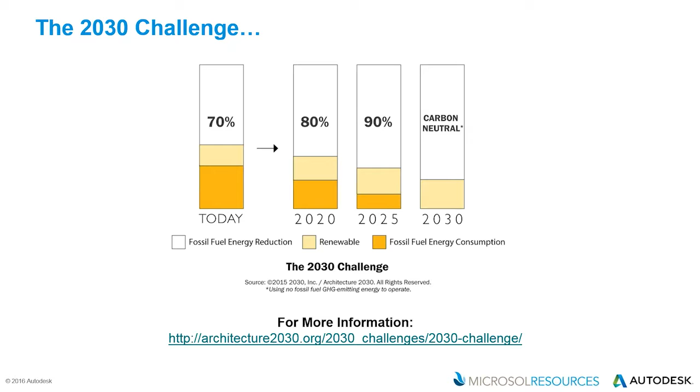The AIA 2030 commitment, on the other hand, essentially calls for all members of the AIA to aim for the 2030 challenge on all projects. And the words I've underlined there are really the key parts. That's aim for. In other words, you don't fail if you don't meet these goals. But the point is, we're trying to transition the industry, trying to educate more owners on the benefits of doing this. And so the first thing is to aim for it on all projects.

And the other critical thing that people often overlook is that they want you to report your data. And I'm going to get into what that means in a little bit.

Well, people often think of it just as the goals, but in fact, arguably an equally valuable part of it is actually reporting the data on your projects so that as an industry we can understand how we're progressing along the trajectory towards those goals. So again, you can go to the AIA to find out more about this.

I'm going to dig into this in a little bit more detail, because this really has taken the 2030 challenge and put a very clear set of metrics around it, and with the reporting we're learning more and more as an industry where we're at and where we're going.

So I'm going to show you later how you can sort of do this, but a critical part of what the AIA have done, really valuable, is that they've developed something called the Design Data Exchange, or DDX for short. And it's essentially an online reporting tool where you can report all your projects. At an individual firm level, the data is private, so you can see all your list of projects, you can see the energy use intensities that you're reporting, and you can see the energy saving strategies that you've committed to, and you can look at them project by project or region by region or building type by building type. There's all kinds of interesting ways you can look at the data.

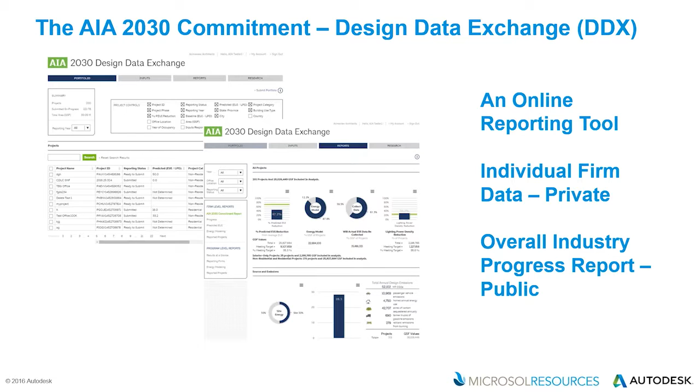So the DDX itself has actually only been out for a little over a year, and this year is the first year that the annual report has been based on the DDX information. Before that, it was a lot of manually gathered information. It was just a lot more work for both the firms to report it, but then also for the AIA to gather it. But these are some excerpts from the most recent report, and it'll give you an idea of where we're at, because it's showing you some historical information.

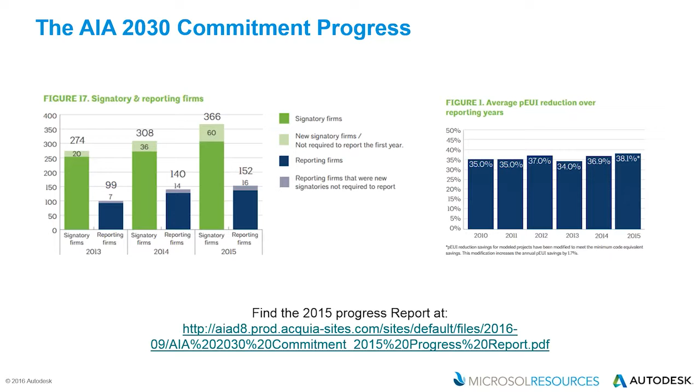the AIA have been quite clear in recognizing that the industry is in transformation. We have the tools to do this, but there's a lot more we could do, and really what it takes is just this commitment. So out of the last couple of years reporting, I've taken a few excerpts, and I just want you to see, can you spot the theme here? I'm not going to read each one out, but it's very, very clear.

In the last couple of reports that the AIA have produced, they are clearly calling out for more energy simulation, energy modeling for every project from the earliest stages to be carried out, and firms to make a real commitment to this, because that is the key to hitting these goals.

It's simply not possible to hit these goals without doing energy modeling, and it's absolutely required that this happen. So we all know that energy modeling is something that has typically been in the domain of engineers or specialist energy modeling consultants. But the AIA now recognizes that this is a skill that architectural firms need to develop as well. And ultimately, it is a collaborative effort, also including the owner, to get to a better outcome and a better building, because everybody needs to make their decisions.

But like I said, these are just some of the key findings that you'll find in both the 2015 and 2014 reports, and the 2015 report is almost saying exactly the same thing as the 2014 report along these lines. So as you'll see, there's a very, very clear call to action around that.

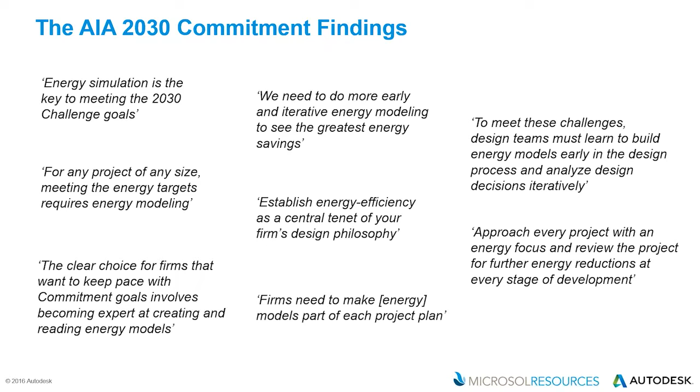So what's stopping us, right? Why have we not moved the needle, and why, despite the main organization representing architects calling for this, isn't more being done? And there is some growth happening. You'll see there is sort of like 8% growth across different metrics and so on, but it's still not enough. There's still a big, big gap. And the reason we believe for this is really the form that existing tools have taken.

Right? So energy simulation, energy modeling has been around a very, very long time. For example with DOE-2, the history of those is nearly 30, 40 years. And remember, EnergyPlus, the more modern engine, is built on a lot of DOE-2. But these tools essentially have been around a very long time. They're very specialized and time consuming. They require a high degree of expertise. And they're very, very focused on precision.

But there are questions about their accuracy. It's the number one question we get asked on a daily basis. Well, how accurate are these tools? How will the energy model's prediction match with the actual building? That's a totally understandable and valid question, but it's actually very difficult to answer with these tools. And the reason is that they're focused on precision and not on accuracy. And let me just explain what I mean by that.

If you take, for example, one of the many, many inputs to an energy simulation, such as the thermal properties of a wall, an energy model goes into the layer by layer construction, and for each material layer, you'll specify things like thermal conductivity, specific heat capacity, and density. And you can get down to decimal places of inputs. And for most users, if they don't understand that data or don't know it, then they don't know what impact that has on the accuracy of the model. And so that, first of all, creates doubt in people's minds.

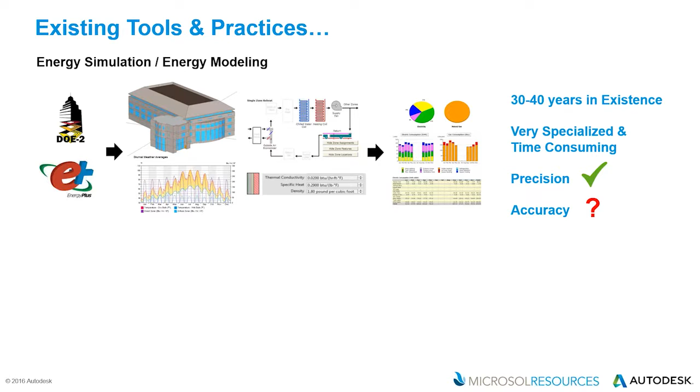And the reality is these tools in the right hands can provide a great deal of value, but they are still very limited to most projects. A small percentage of projects, like the big projects with big budgets, get to use energy modeling. And the value of energy modeling and energy simulation and all these amazing capabilities that are in engines like DOE-2 and EnergyPlus, they're really not being realized because of the form they're in.

To add on top of that as well, the dominant usage and knowledge that people have of these tools is really for energy code compliance and green building rating systems. And these take something that's already kind of complicated and add a further level of rules, regulations and complexity around it. And ultimately, they provide a rating, but they're not pointing towards an actual outcome. So an owner can't base an investment decision on a 20% saving above an ASHRAE baseline, because that baseline can never be measured. So the existing tools play a role, but they're not in a form that really maps to the design process.

And that's the reality. There's compliance energy modeling, there's energy modeling for HVAC systems design and analysis, because that's where the domain typically resided.

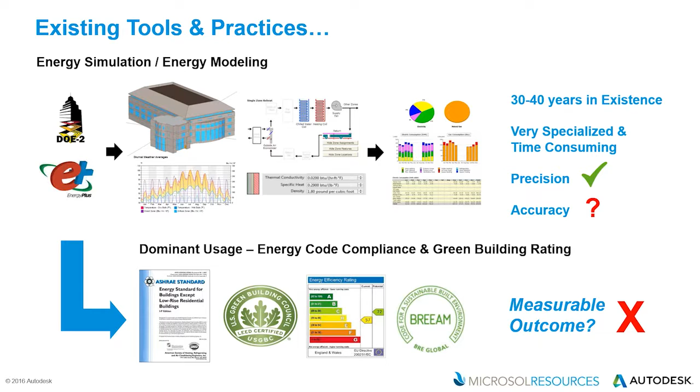But from an architectural perspective, and particularly early on, and at the whole project level, energy modeling has not been in a form that the whole team can consume and collaborate on, and particularly architects early in the process, when it's so critical, can do a lot of analysis to really help inform design.

So if that's the existing paradigm, the way we position Insight 360 is that it is a new paradigm. And this isn't just us saying this. Many of our customers that have already started to explore and use Insight 360 are now realizing that this really is an entirely different approach to the way energy modeling is done.

And essentially the key elements of it are that, first of all, very clear indicators of performance and performance value, i.e. energy use intensity, or more critically, energy cost. Everybody understands cost and running cost, and that's something that's of interest to most owners.

We then provide, rather than tons and tons of just output, very clear cause and effect feedback on the major drivers of building energy, i.e. the major factors of architectural design, engineering design, and operational factors that drive building energy.

Optioneering and comparison is built at the center because, at the end of the day, in order to get to a better design, you need to be able to compare and contrast and understand. So considering many different model options and many different factors and scenarios is a critical thing, and the whole user experience is built around that.

Then critically, of course, it is BIM integrated, right? And not just from a single model state or from a specially created analytical model. What we've got with Insight 360 is essentially the ability to automatically create a high quality energy model, all the way from very early conceptual massing through to detailed design, right?

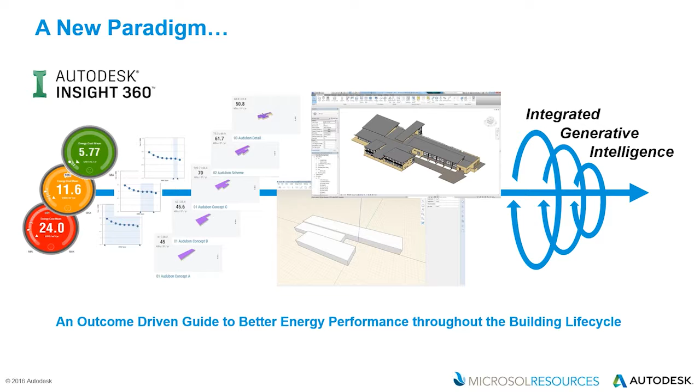Okay, so I'm going to flip over now to the demonstration. Okay, so I'm going to start this story actually in Revit because we can see the whole picture of things in Revit. This could just as easily start in FormIt at the very early conceptual massing stages, because as you model in FormIt, you're also actually creating Revit files behind the scenes which can be opened up in Revit. The advantage of doing it in Revit is that some of the steps that happen are more visible in Revit. I'm going to walk you through that.

But of course, the first step in doing an energy model is the model itself, right? And that's normally where people in the past have hit a barrier because they don't know what an energy model is, they don't know how to create one, and it requires that specialist expertise to create, do thermal zoning, etc. Well, essentially, all of that knowledge is now being embedded in Revit, and the idea being that, if you can do basic architectural modeling in Revit, you can now create a very high quality energy model at the click of a button. All you need to do is just understand some very basic behaviors in the way that translation is actually done.

So this example here is a very simplified representation of the design process of a building, where in most cases the building footprint and massing is pretty well defined based on things like the site and the program and so on. But obviously that's variable. As much as you can model and vary your building model or your massing, you can analyze that as well. But the point that this is really showing is that you don't just start with this. You don't start with a detailed Revit model. That doesn't appear from nowhere.

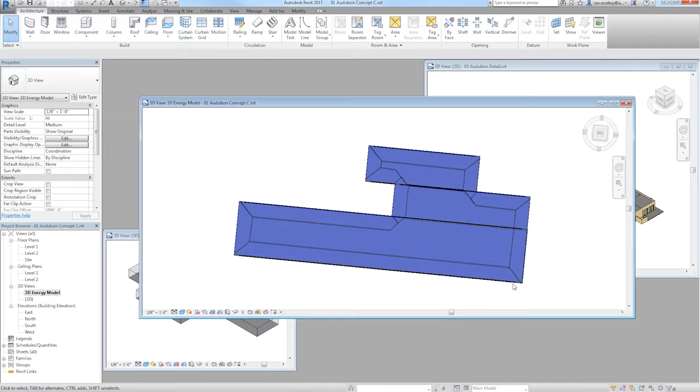What we mean by that is when you've got nothing but massing or open plan office space configuration, we subdivide the interior of that building with the perimeter and the core, based on different orientations, to make sure we capture the variation in heat distribution throughout the building, throughout the day as the sun moves around it. That's essentially the way an HVAC system would be designed. And remember, at this stage we haven't even got an internal layout.

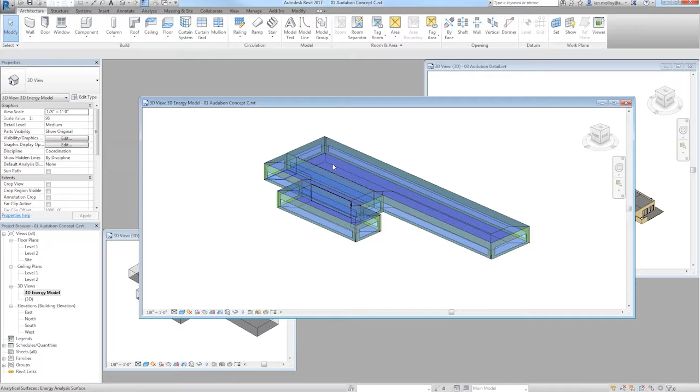You'll also see that in this case, we've parametrically applied 40% glazing to that energy model. We don't even need to do that, but that's literally just a setting we need to set. You'll see in the actual architectural model, I haven't made any decisions on glazing yet, because we're going to use Insight 360 to help inform what those glazing decisions need to be.

So I'm actually going to come back to these two later, but I'm going to start now at this very early stage. Remember, this could start at any stage, and what I would say is that if you haven't done energy modeling on detailed design projects yet, don't worry, it's still not too late. You can still do the energy modeling, report your data, and then in future start to look at doing this modeling from earlier stages in the process.

Because you'll find this: a lot of people think this simplified modeling doesn't provide a lot of value, but you'll actually find it's extremely informative and almost as valuable as the detailed model. The only difference with the detailed model is that you get to more design specifics later in the process.

So starting with something as simple as conceptual massing, if I simply set the location, that's the only other thing we require you to set that's project specific. When you click Generate Insight, that will send the model to the cloud and run the simulation.

That will appear in Insight 360. Insight 360 is essentially a new skin or new user interface for Green Building Studio. Green Building Studio is still there, still used to do the cloud-based energy simulations, and all the results are still stored and viewed on Green Building Studio. But Insight 360 provides a much better way to do comparison and view models. You'll see one for each of the Revit models I created. So if I click into this model, you'll see what Insight 360 does.

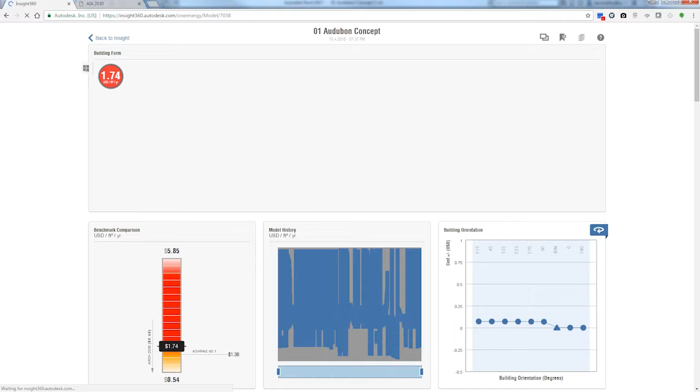There are a couple of key components to it. First, this number in the corner is what we call the energy cost mean, and at the moment it's showing $1.74 per square foot per year. If we wish, we can switch that over to energy use intensity. Some people prefer that metric, but we generally show it in cost because everybody has a better internal sense of what cost means and what its value is.

But you can see that switched over to EUI there. Even though we're showing one number in the corner to provide clear direction, it's actually a range, and that number is actually the mean of the range. The range in this case goes as high as $5.85 to as low as 54 cents a square foot.

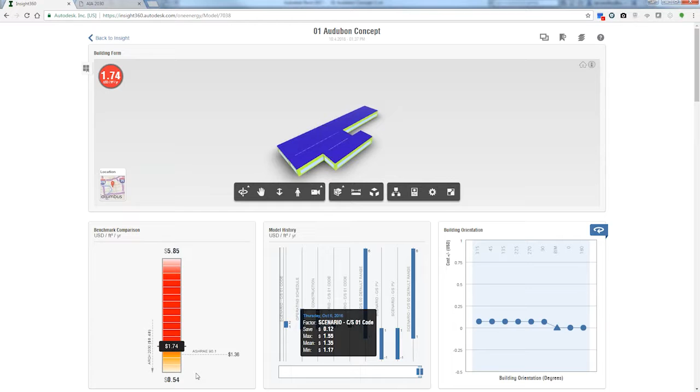You'll see there are two benchmarks here. One is ASHRAE 90.1, which is essentially code compliant, and the other is Architecture 2030, which is much lower down. That's what causes that little dial to go from red to orange to green. Red is above 90.1, orange is below 90.1 but still above Architecture 2030, and when you hit the Architecture 2030 goal, it goes green.

So how is it calculating this range? First, all we've told it so far is we've given it a model, something as simple as some massing, and a location. What Insight 360 then does is essentially run a few hundred simulations which parametrically vary all the key drivers of building energy, computing the entire set of potential outcomes.

So we know that the best of the best would give us 54 cents a square foot, and the worst of the worst would give us $5.85, and everything in the middle. The current mean of all that, sort of like an area-weighted mean, is $1.74. So it's a very wide range.

Even from here, if I went back and changed the model, I'd be able to see the relative difference on that one without setting anything else. But it's a very wide range, and the point is essentially to start to look in and narrow down that range. So what you'll see here on Insight 360 is that each card is an individual factor.

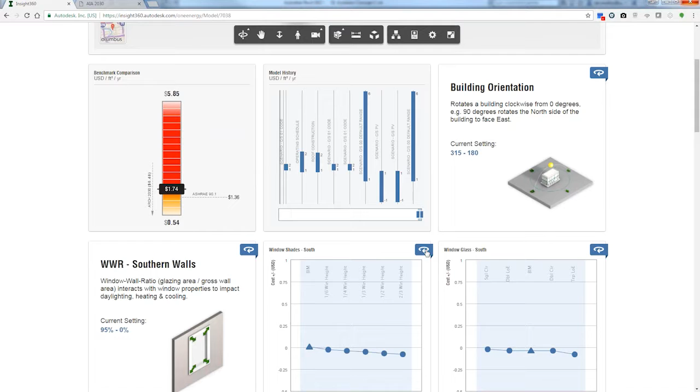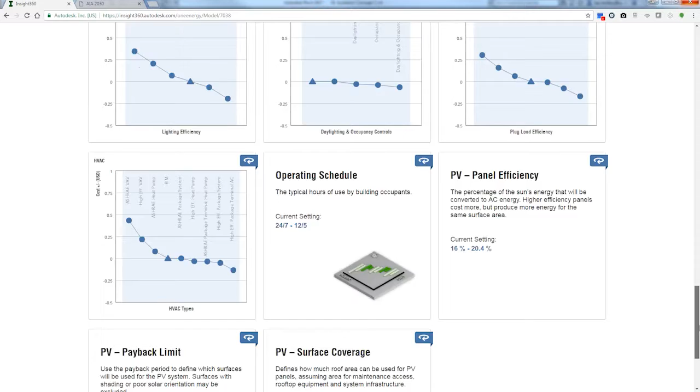For example, we've got building orientation, window to wall ratio on the south facade, shading on the south facade, glazing type on the south facade, and so on. There's about 24 factors in there. Many of them are grouped and related, covering PV, operating schedule, and so on. I'm going to get into some of these in a minute.

But the basic user interaction model is as follows. Existing tools and workflows require you to analyze a single configuration — here's a building with this orientation, this glazing, et cetera — and you'll get a certain energy use. Because we've run an entire range and computed it, what we then get to see is the actual value of each of these individual components.

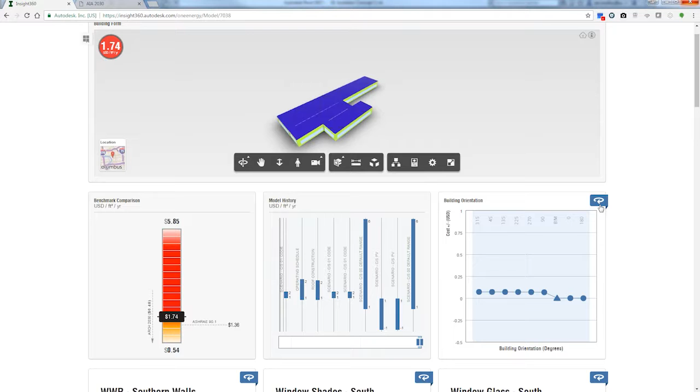So when we come to orientation, without setting anything else, we can see the best and the worst. This graph shows that the worst performing orientation is 315 degrees away from the base, which would increase energy, and the best orientation actually reduces energy by about 9 cents a square foot.

So we can see that orientation does play a role. It's reasonably important, but it may not be as important as some people think. It really depends on the building geometry.

In this case, what we can see here is this little triangle, essentially what we call the BIM setting. This is whatever was actually submitted from the model, whatever that orientation was—remember I mentioned that was a south-facing facade. In this case, I'm not going to change the orientation of the building.

It's rare that you have that potential to do that. If you saw a very steep sloping curve here, it would be telling you that orientation plays a big role, and maybe there's something about the shape of your building you should be looking at. But basically, very quickly, it allows you to assess something as simple as building orientation, make that decision, and move on to the next set of factors.

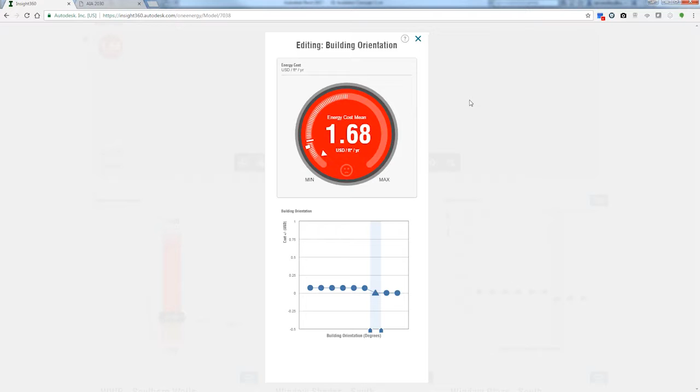Let's look at window to wall ratio, a very common question, again on that south facade. What we can see here is, again, a much steeper curve. If we were to go up to fully glazed, you'll see energy will go up $1.77. If we went to no glazing, which may not be practical but shows the full sensitivity of glazing, you'll see it goes down to $1.60.

In reality, we're probably somewhere between 40% and 100%, which, if you remember, was the design goal—to increase glazing. So the point is, I can see here there's around a 10-cent cost or saving, depending on what way I do this. So the interesting thing is, if we increase southern glazing and want to compensate for that now...

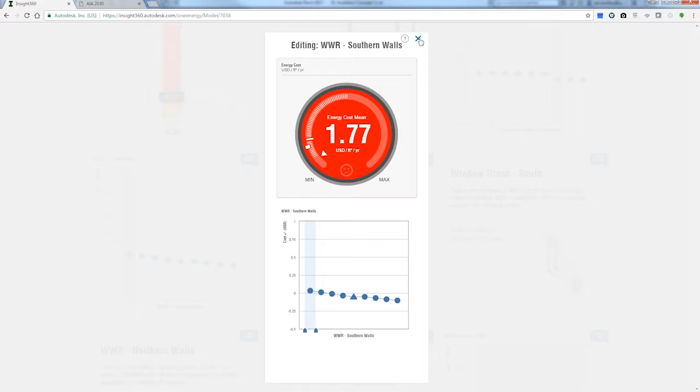What we can do is implement some passive strategies, like adding shading, exterior shading. So let me show you the little graphic for this. By adding exterior shading to each of the windows, again parametrically here, we'll see that shading plays a big role.

For example, with no shading, 100% glazing, your energy cost is going to be very, very high. If you went to about 2/3 window height glazing, so quite extensive shading, you can see that's very valuable—20 cents a square foot for adding shading.

Maybe you don't know exactly how much shading you can add at this stage, but you know you can add some, so you can target a broad range. The point of this whole interaction is that you don't get bogged down in the specifics—going back to the example of the specific heat capacity of the brick. That actually doesn't matter, because the main driver is the overall performance of the wall, along with all the other pieces moving at once.

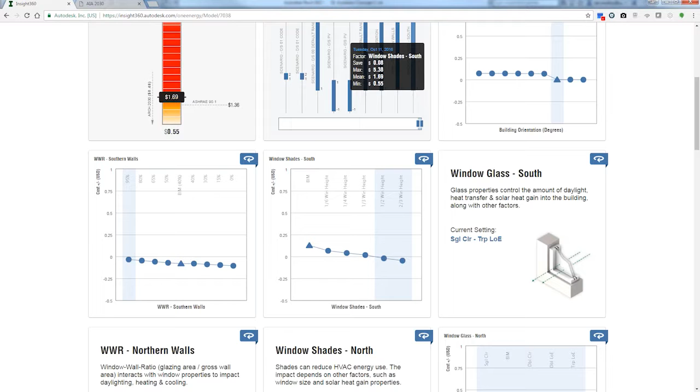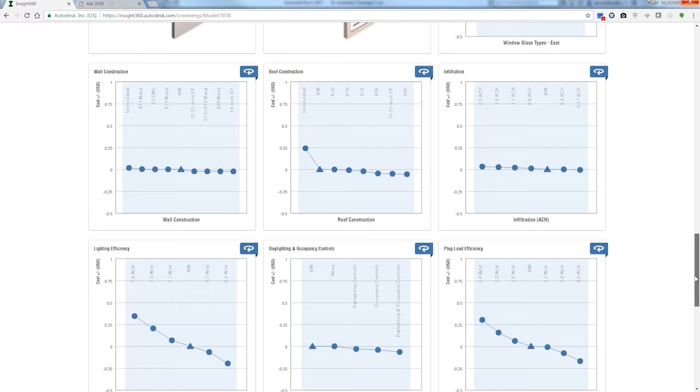So you can go through each of these factors—window to wall ratio, shading, glazing, for each of the major elevations, wall construction, roof construction, infiltration, lighting efficiency, plug loads, HVAC systems, operating schedule, and even down to PV. PV is a critical strategy for achieving the 2030 challenge in a lot of climate zones.

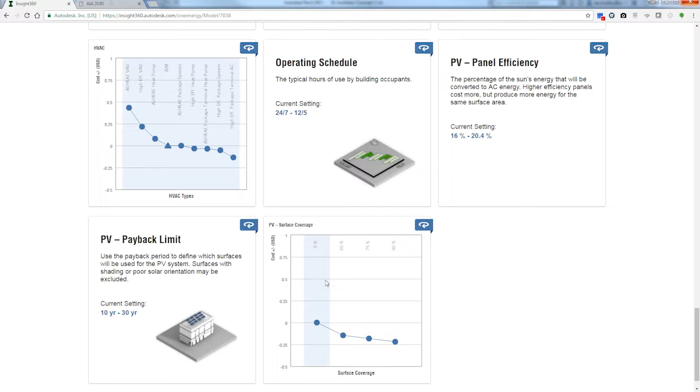You can very simply see it by percentage coverage of roofs, so you're not having to model a specific PV system. We've already computed that if you run this range of roof coverage with ranges of efficiency and payback, you'll get a certain energy saving for them. So it really allows you to very quickly strategize what your overall goal is.

So that's the overall workflow and user interaction. But the way to use this is essentially that each of these factors can be configured to represent some scenario. And in this case, what we've done is we've essentially—I can store each of those scenarios.

The first scenario I've created here was what we call a code compliant scenario. If you look down through these scenarios, you'll see it's like 40% glazing, and the roof construction is roughly in the middle, and so on. So basically we now know, and you can see by the actual energy cost, that it's very close—within a cent of the code.

This is our starting point, the minimum that we need to do. What you'll see here, for example, is window to wall ratio on the south facade around code is 40%. And notice I haven't said specifically 40%—I've said a range, because I could have more on the south and less on the north, and so on.

I can compensate because it's an overall building property. But the next thing I can do is if I increase the window to wall ratio on the south facade, you'll actually see here it's gone up to $1.47, because you see I've saved that overall setting, and that's the one change I made. So you'll see that if I build to code but I want my large windows on the south facade, I'm going to have to do something to compensate for that.

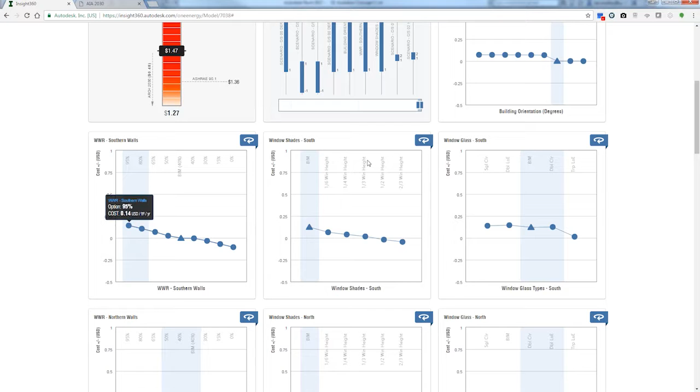So what I can then do is, like I showed you earlier, I can go in, I can add shading, I can improve glazing performance. This is a full range from sort of single glazing all up to very, very high performing glazing. Each of these factors covers an entire range from sort of the very worst performing to the very best. So we get the full sensitivity of each, and essentially we're multiplying all those scales across one another. But what I can then do is find a sort of sweet spot on each of those curves, so I can essentially optimize the building envelope.

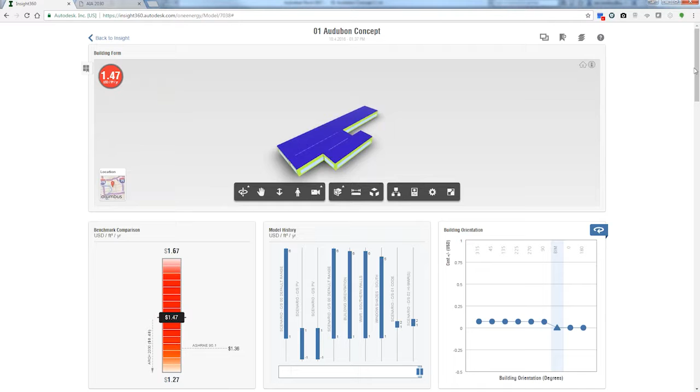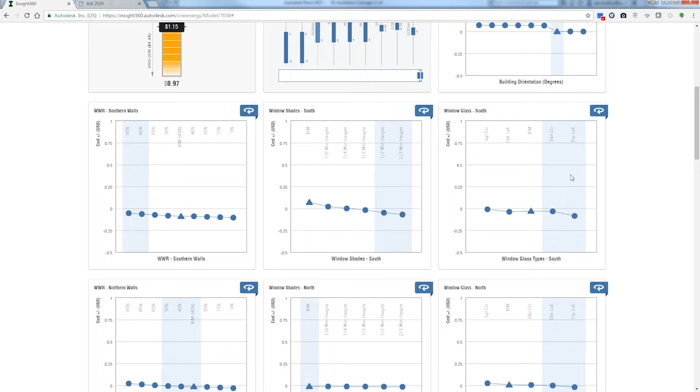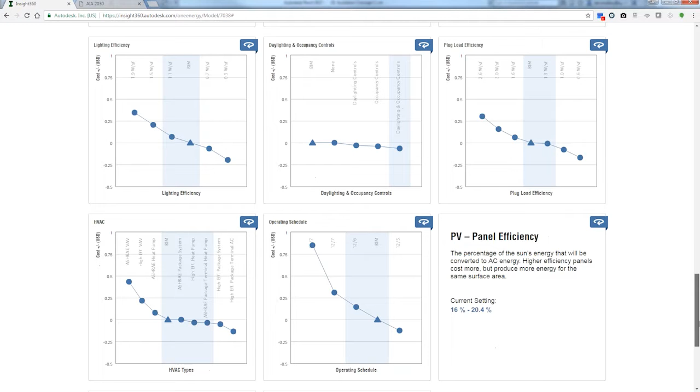And you'll see this greatly reduces the building energy cost now, because even though I've still got my 80–95% glazing, I've added some shading, I've got higher performing glazing, I've not put shading on the north or the west or the east, because there's not enough of a return on investment. You'll see, for example, I've got higher performing wall construction, roof construction, higher performing infiltration, etc. Because each of these things played enough of a role in the energy savings to say, right, I'm going to do this.

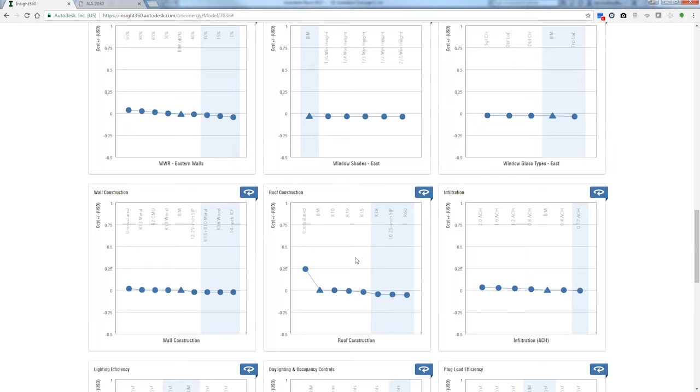And again, a good example where people get bogged down are in things like the roof properties, or any of the material thermal properties. Rather than getting bogged down in the specifics of the actual thermal properties, that will come later. From here, you can very quickly see, okay, well look, roof construction does play a big role, but once you add any insulation at all, you very quickly start to work on the law of diminishing returns, right? So it goes from $1.20 to $1.15, but then from here, there's really no change, right?

$1.14 across those three. So all we can say is we haven't decided the exact details yet, but we know we're targeting reasonably high performing roofs, somewhere between code and very high performing. And you'll see that with only a few cents a square foot playing a role, we don't need to worry about the specifics of that at this stage, and we can continue to target our overall performance.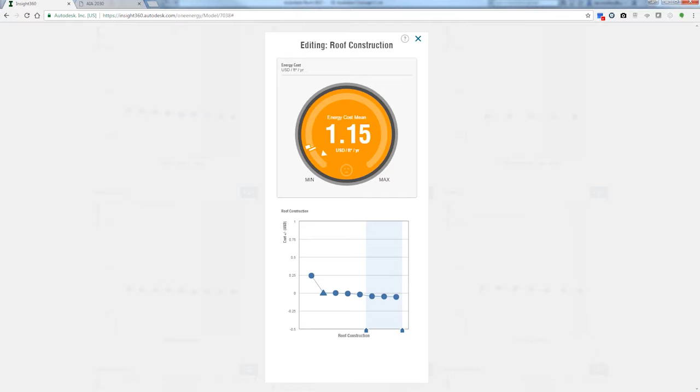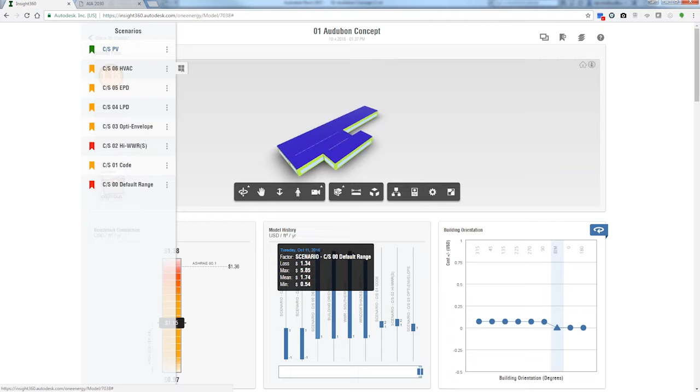So now that the overall envelope is sort of optimized, we can now look at, for example, improving the lighting power density and the equipment. These are other major operational pieces that we can assume, as well as the HVAC energy, and then ultimately have an overall strategy that essentially hits the 2030 goal. And so let me just take a little bit of time to update.

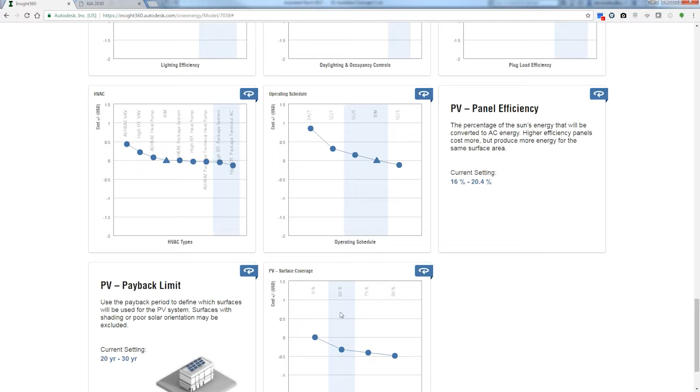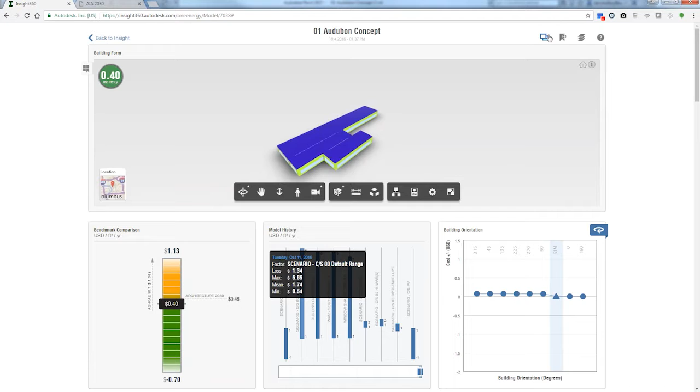So you'll see now this is flipped over, and the way we've done that is essentially we have optimized everything, right? A better performing envelope, higher performing HVAC systems. We've even included some photovoltaic, around 50% surface coverage, assuming a certain payback limit. So the point is we've reached this strategy very, very easily, and we can clearly show the path from doing nothing to increasing our glazing, to just building code, to optimizing our envelope, or LPD, or EPD, HVAC, and PV. So you can tell any story you want.

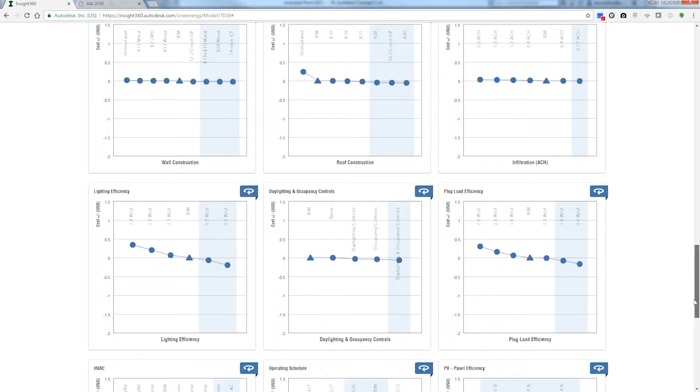You don't have to export things to Excel or try to create special reports. This is the report, and it's dynamic and interactive, so that, for example, if a client asks the question, well, how will this building energy model relate to my actual building energy? Well, if they build and operate the building this way, it will use this much energy. Lots of work in measurement and verification with simulation has proven that. But the big reason why energy is often different in operation is that the building is operated differently.

So the owner can see the thing that they're responsible for, for example, operating hours. So here we've assumed in this case that the operating hours are somewhere between 12/6 and 12/5. But if, for example, this was a speculative office development and we didn't know the range, the actual building energy is probably going to be more like 49 cents with a wider range up to $1.50. So if we say, okay, well, if it was all 24/7, it would be up here. If it was all 9 to 5 or 12/5, it would be down here.

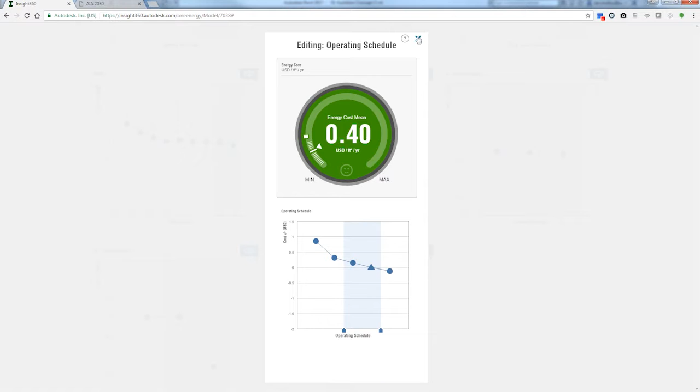So the point is you can very quickly see the cause and effect of the major design and operational factors. And the team working together is very easily able to set these targets from the earliest stages. So remember, all of that is possible from starting with something as simple as a box, because we've looked after everything else around the thermal zoning and we've varied everything to really help you provide that guidance.

So now that we have that guidance and we believe we can achieve that target even with our 80–90% glazing on the south facade, naturally we start to evolve the model and start to represent the feature curtain walling and so on in this model. And again, at this stage, you'll see how the energy model now starts to take on more of the physical form of the building, the interior spaces and so on.

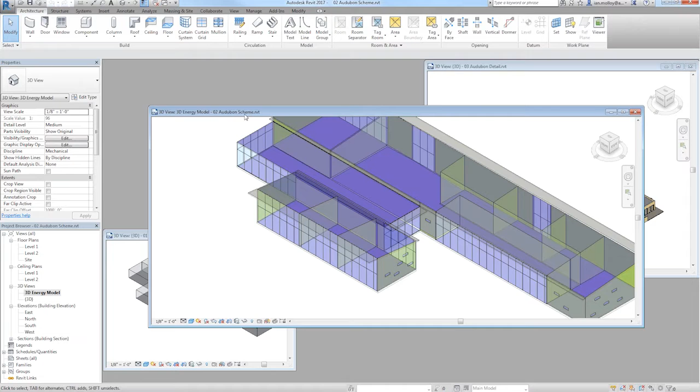And you'll see some of the really cool things that the energy model creation does, where in the Revit model that's like a single roof, but analytically for energy simulation, only part of it takes part in the heat transfer to the room, and the other part, the overhang, essentially causes shading. Okay? So in the same respect, we were looking at shading as a factor back here. This is shading as an actual design element, something that's in the building information model. So that when we go back later on and analyze this model, submit this to Insight, what you'll see here, let's go back a step.

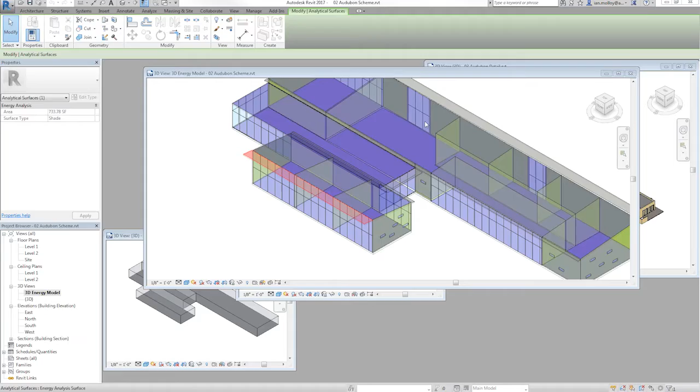And what I'm going to do is show you another little cool thing. Basically, we've got all these different models, and back there I created a scenario for PV. So I'm going to apply that scenario to all these models. Okay, so I can have these. I could have on the left-hand side 3, or 10 different conceptual massing options. I could have different detail design options, and I can very quickly apply those different scenarios to each.

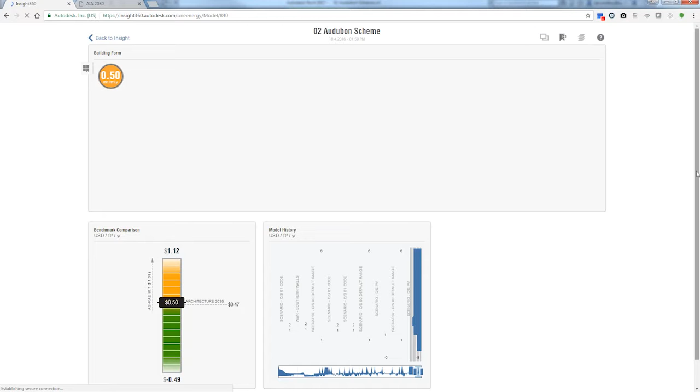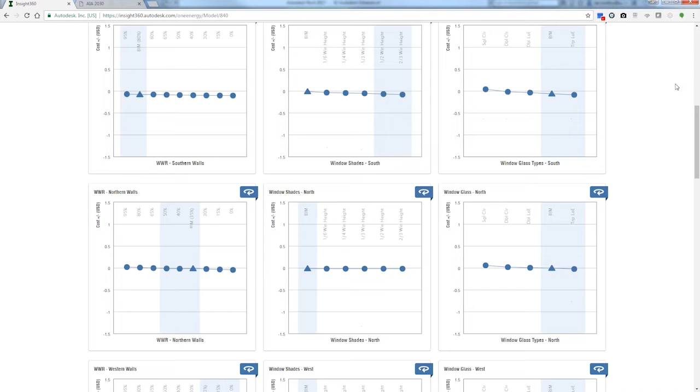But if I go into this schematic design, what you'll see now, when I look at the window to wall ratio, remember earlier the BIM setting was 40% because that's what we had parametrically told the model to do, because we hadn't modeled any glazing. Now what you'll see is that the BIM setting for the window to wall ratio has worked out to be 80%, the actual window to wall ratio. So again, even at the schematic stage, I can say I'd maybe still target 80–90%, but if I want to say that's exactly what I want to use, I can specify that.

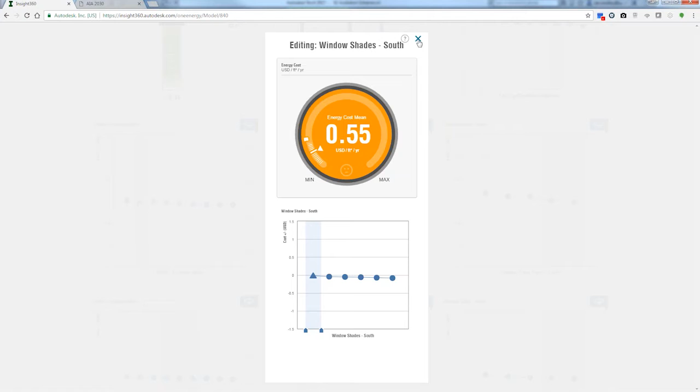And then equally, now that I've got shading on that south facade, I can essentially say I don't want any shading, because you actually see the line is now flat because there's already shading in the BIM setting. So basically, what this allows us to do is very easily scale from the very earliest stages through to schematic design, all the way through to detail design.

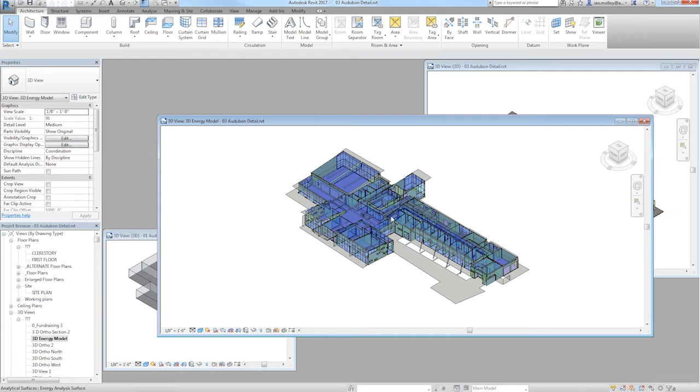And detail design is where energy modeling typically only starts, when it's sort of too late. But what you can do is, again, Revit will look after the creation of a very accurate, high-quality energy model. So this energy model is more or less proportionally accurate to the building information model. Energy models are usually greatly simplified, and that's okay because they're used for comparative purposes, but there's really no need to do that simplification because Revit looks after that.

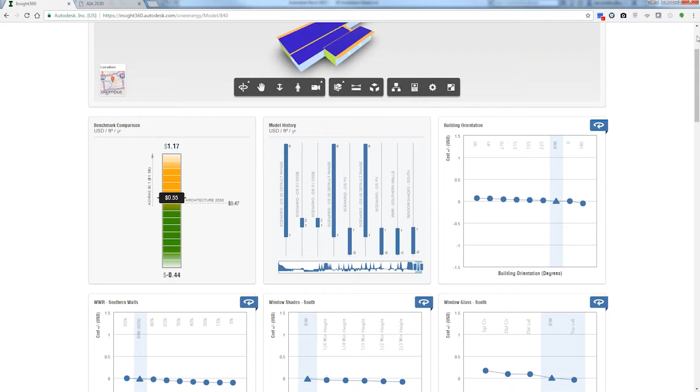And then when this is submitted to Insight 360, we'll see essentially the exact same workflow, where I have my model submitted and I'm applying ranges to each of the factors. The one difference with the detailed model, or even the schematic model, is that pretty soon at these stages you start to decide things like the properties of the roof, the wall or the glazing, or in an interior layout, the room by room lighting power density, occupancy, equipment and so on. And if you specify that information in the Revit model, that gets used in Insight 360.

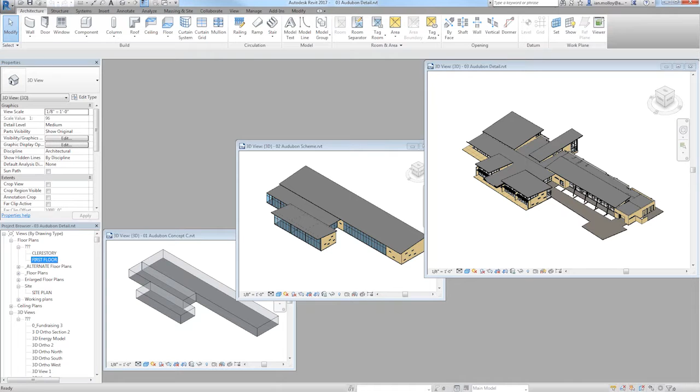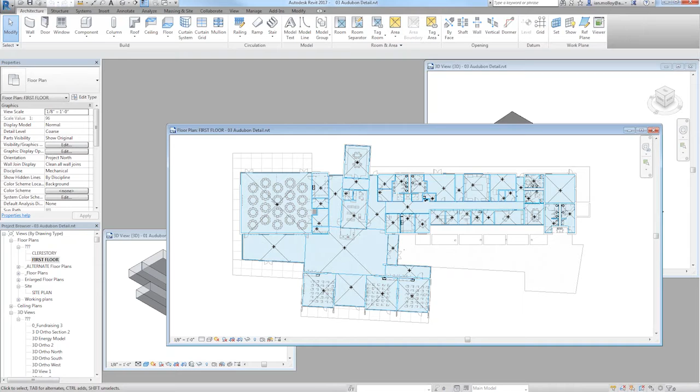And then, so I'm showing a floor plan here. Everybody knows rooms. Well, there's also spaces in Revit, and they contain occupancy, lighting, equipment, space type, things like that. All the classic energy model input settings. And the point being, you don't have to start with them. You can start much, much earlier. Use Insight to essentially guide your decisions as you go.

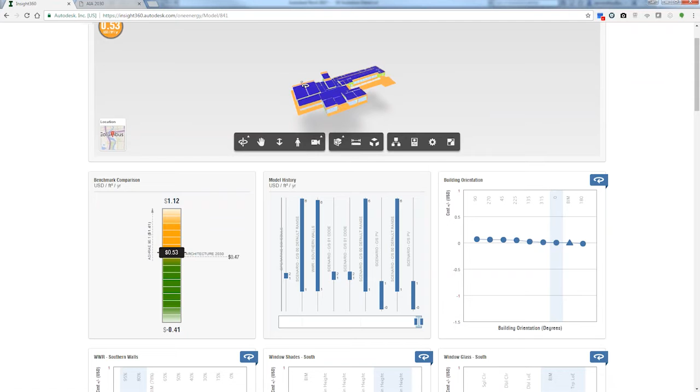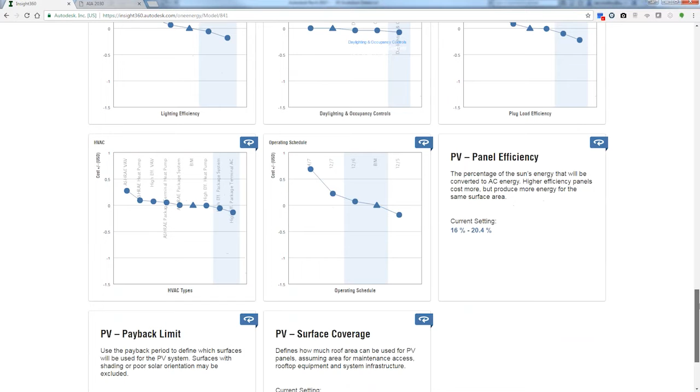And then when you get to this detail level of model, and if this model contained exact thermal properties of roof or wall, and exact specification of interior layout and space properties and so on, that will all be reflected based on what we call the BIM setting, right? So again, you'll see here in this case the schedule here. That's exactly the building operating at that point of performance with that level of occupancy and so on, which is what's used in a sort of compliance rating performance.

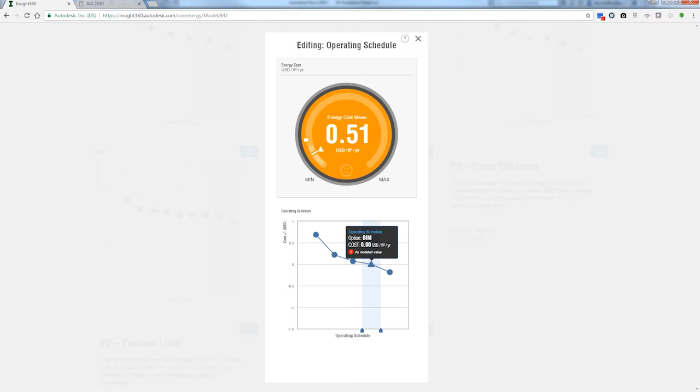But in actual design, you should really be designing for a range of operational performance, and that's something that you can agree with the client and the design team. So you may want to assume a slightly broader range, because you don't know for sure exactly what the range is. So in other words, it allows you to work with as much or as little specificity as you want, and allows you to identify design opportunity, manage operational uncertainty, and help keep the whole team driving towards better performance.

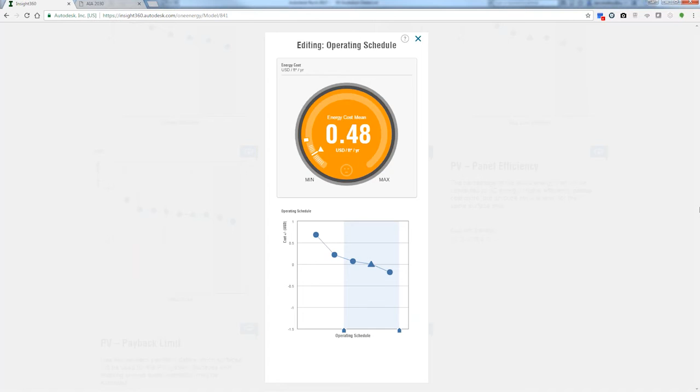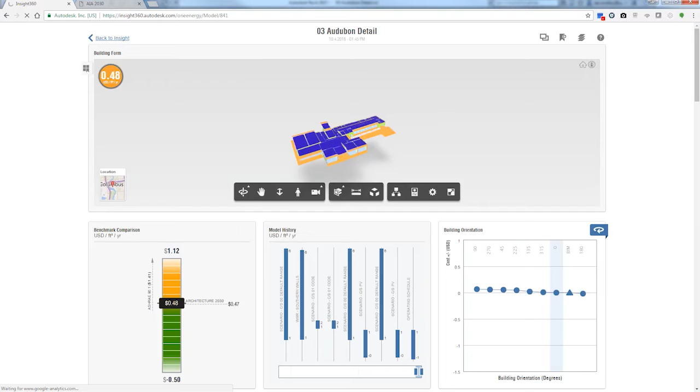But ultimately, the ability to model from concept to detail: start with something as simple as a set of conceptual masses which anyone can model in Revit. Apply that to Insight 360, and then use the range of factors to help with broad targeting, and move throughout the design process with that immediate cause and effect. Use this as your reportage. You can certainly take this information out, but one of the really cool things again is the ability

to add members. So I could add Joe engineer and Bob the owner, to say, hey, these are the assumptions that we're designing to. Do you have any views or opinions on these? And that's where engineers can advise on good assumptions for LPD or EPD, HVAC system assumptions and things like that, as well as the owner can start to understand that their hours of operation play a role, something needs to be assumed, and as they can see that's a very big driver, it helps justify more investment in documenting that information to a higher level of detail. So that's essentially the overall demonstration of Insight 360.

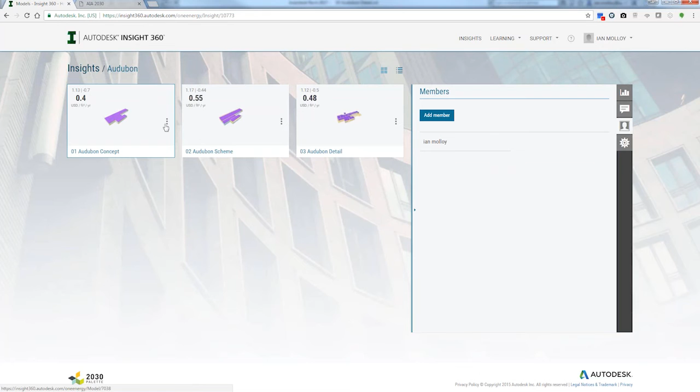And there's one final thing I wanted to show before I finish, which is linking back to the 2030 DDX connection. At any stage in this process, just to be clear, the AIA and the 2030 do an annual report, but they really encourage people to report regularly, not just once a year. And that's normally a big task for people because of this manual process. Now with the DDX, and the ability to do it directly from Insight 360, all you need to do is, for any of these models, click here and go export AIA DDX. All I need is an account with the AIA 2030 DDX, which any member firm has and will be given.

Once I add that to Insight 360, it'll automatically pull a number of fields from Insight, like the EUI, the window to wall ratio, lighting power density. I can fill in some details, and then what you'll see over here is the DDX itself, and these are some of my projects. This is a test account where you'll see the most recent project, Courthouse, and so on.

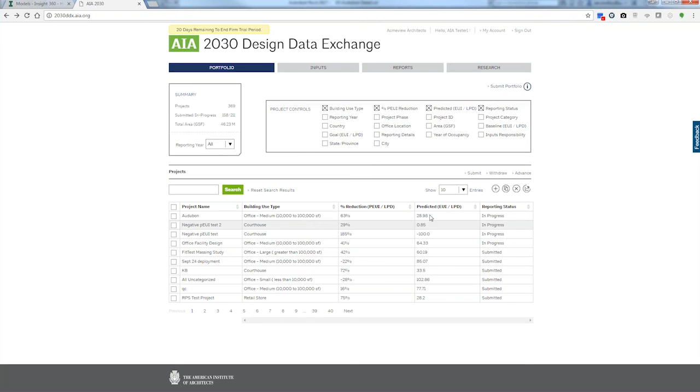If I now simply click send, the AIA DDX will send successfully, and then if I go into the DDX itself and click refresh, you'll see that this project was called Audubon, and it's an office, medium 10,000 to 100,000 square feet. You've got a 63% reduction in EUI. There's the overall EUI, and I can click into it and see the project details.

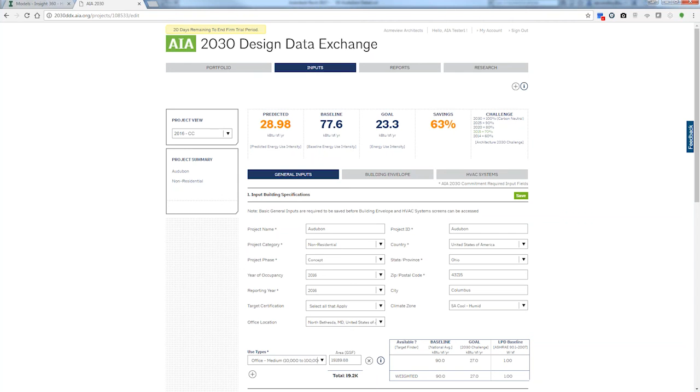So not only can I use Insight 360 for helping inform the design, but I can also use it for automating the reportage, because normally all this information has to be put in manually, meaning at best it's done once a year. As we said, less than 50% of firms are reporting, because that's still seen as a major overhead. This provides you the ability to do the analysis, drive the design to a better place, and do the reporting all in one.